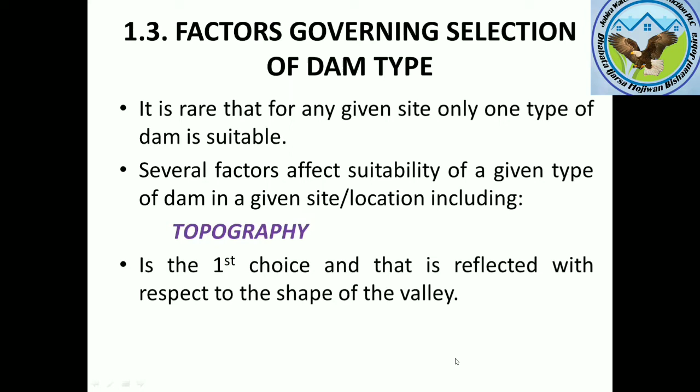Topography is the first criteria to be considered, which is reflected with respect to the shape of the valley. Topography is valley shape used.

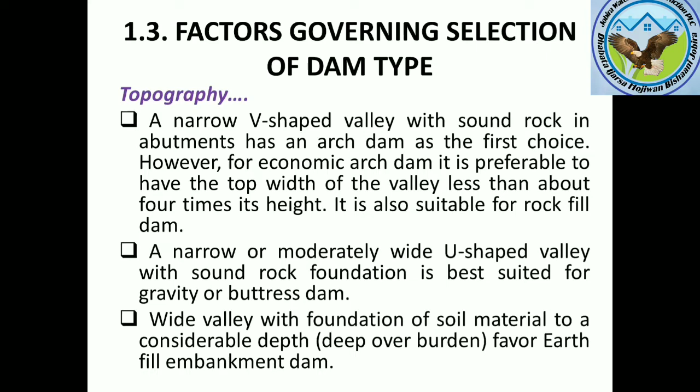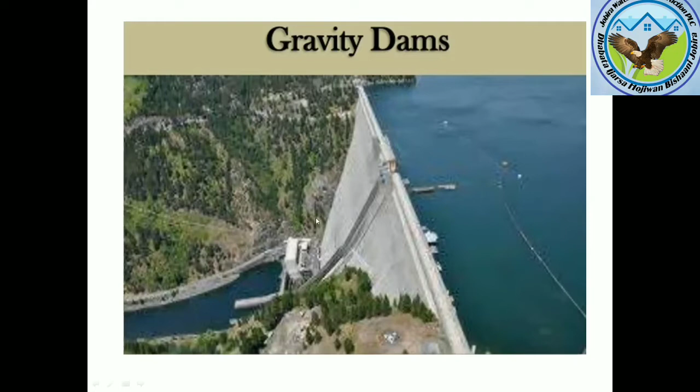See this one, it's nearly U-shaped. It seems V-shaped, but it's a U-shaped valley. In this case, this is a gravity dam, concrete gravity dam, and as you can see it has sound abutments, and this one is a gravity dam in operation. So a U-shaped valley with good foundations is suitable for a gravity dam.

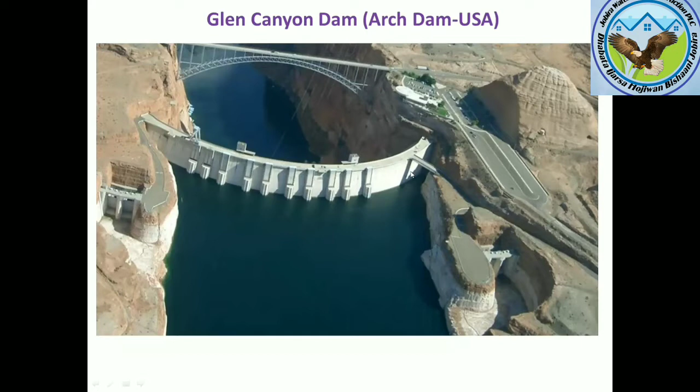In fact, there was some problem during the construction in the case of Tekeze Dam, but that was later resolved — specifically, yielding of the abutment was encountered at one occasion during the construction period.

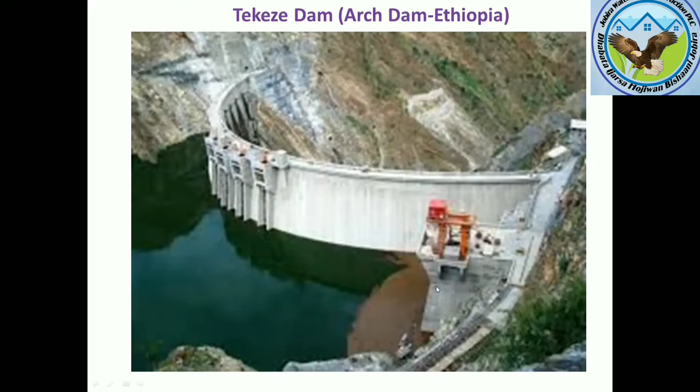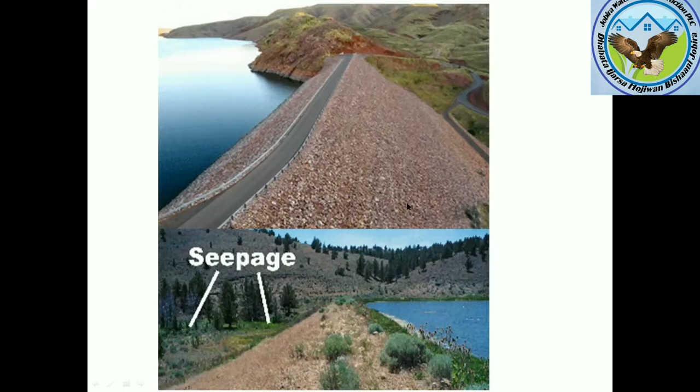And the seepage cannot go away, right? So in the case of embankment dams.

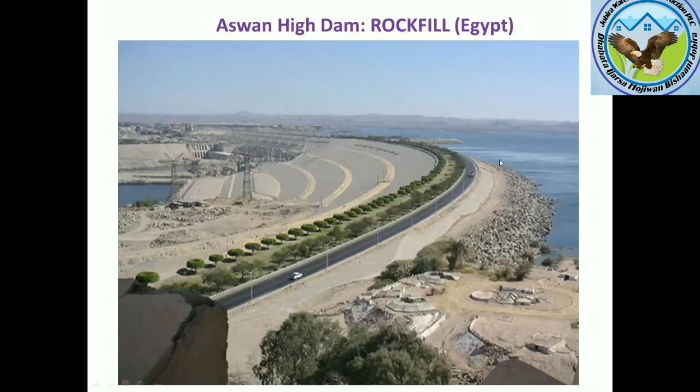And then you can see it's just very long dam crest lengths. So that's Aswan High rockfill dam in Egypt.

The other factor which affects the selection of dam type is the foundation or the geology under consideration. Foundations have to carry the weight of the dam. The dam site must be thoroughly surveyed by geologists to detect the thickness of the foundation strata, presence of faults, fissured materials, their permeability, slope, slip, etc.

So the foundation structures — something related to the foundation conditions, the geological setup — that's really important.

In nature, you can encounter quite a lot of foundations, such as solid rock foundation. If you're lucky, you can just get solid rock foundation, which has good integrity.

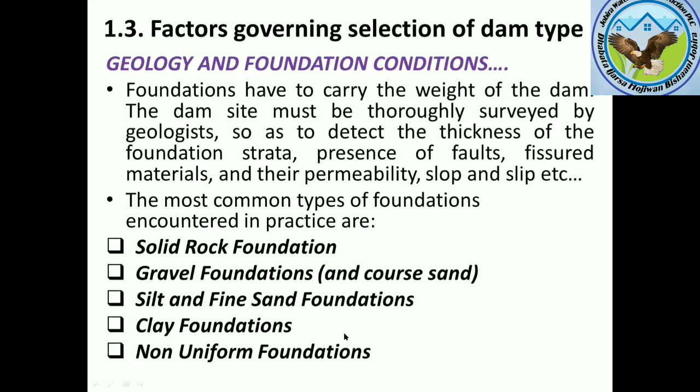Anyway, in that case, how do we go with that? Treatments of foundations are important.

We are dealing with one proposed dam quite nearby us here in Arba Minch a couple of days ago.

And then the geology and the foundation conditions were really disappointing.

The geotechnical investigation showed that at the center of the valley there was a weak foundation, but at the abutments it gave good results. But even the depth of the bedrock they could not get at the center, and they were disappointingly forced to miss the site because they could not construct any type of dam due to fear of seepage. So it's really a pressing and determining factor — the geology and foundation conditions.

If they don't give good results, if the foundation is weak, and if there is a problem with the bearing of the foundation, or if seepage is anticipated, then what's the point now? You have to just bring it down, right? So that's really the case, and that's quite important.

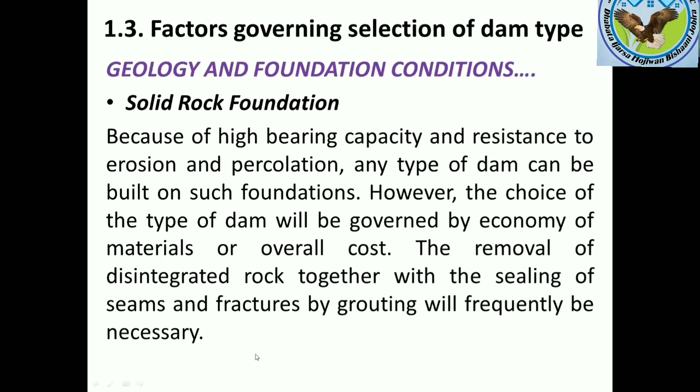Certain times you may have solid rock foundation, but that foundation may consist of weaker materials, such as weathered rock, weak zones, openings, or cracks elsewhere in the dam site or reservoir area. In that case, you may look for treatment of the foundation, such as sealing of the openings and fractures by means such as grouting, which fills up the voids or cracks very well, and then you may use that site for construction of a given type of dam. Anyway, solid rock foundations are very good.

We can also have gravel foundations and coarse sand. If well compacted, such foundations are suitable for earth fill, rock fill, and low concrete gravity dams - dams having heights less than 15 meters. As these foundations are frequently subject to water percolation, foundation seepage is a tempting problem in the case of gravel foundations. Special precautions must be taken to provide effective water cutoff or seals.

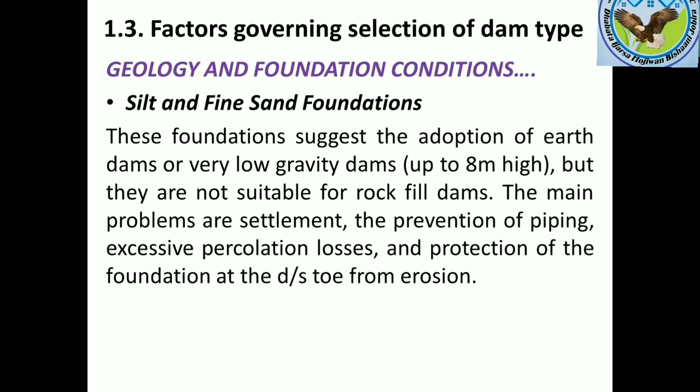excessive percolation loss, and protection of the foundation at the downstream toe from erosion, in the case of silt and fine sand foundations. Clay foundations can be used to support earth fill dams after special treatment - these foundations require special treatment after consolidation of the foundation. The behavior of clays is that they hold water for a long period of time.

If clay holds water for a long period of time in the foundation, the uplift pressure on the dam bottom will be very high. So that should be avoided, and to avoid it, the clay should be consolidated - meaning the water from the clay foundation should be removed. Of course, there are methods to consolidate clay.

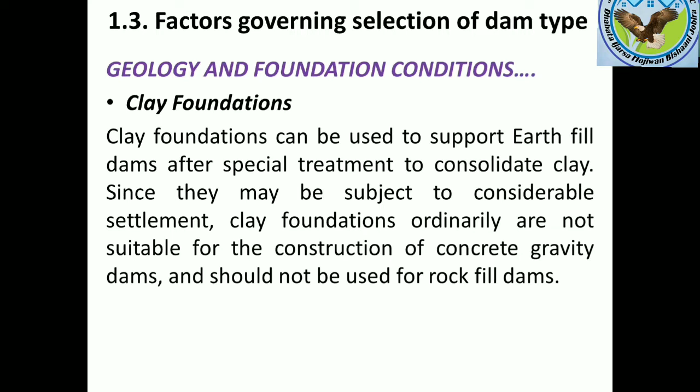That brings the issue of settlement quite high in the case of clays. So clay foundations should be treated very well by consolidation mechanisms and other treatment methods. Clay foundations ordinarily are not suitable for construction of concrete gravity dams because of the excessive settlement that's expected. Rock-fill dams also are not employed on clay foundations because of the settlement problem.

Finally, you have non-uniform foundations, which is the physical and practical case in the field - you have quite a lot of different materials in the foundation. That's non-uniform: somewhere gravel, somewhere clay, and you may have a non-uniform foundation of rock. Soft material may have to be used if the dam is to be built. Such unsatisfactory conditions have to be dealt with by special designs or appropriate foundation treatment.

So you may not just treat one place, but you may treat different places, either in the foundation of the dam or in the reservoir area.

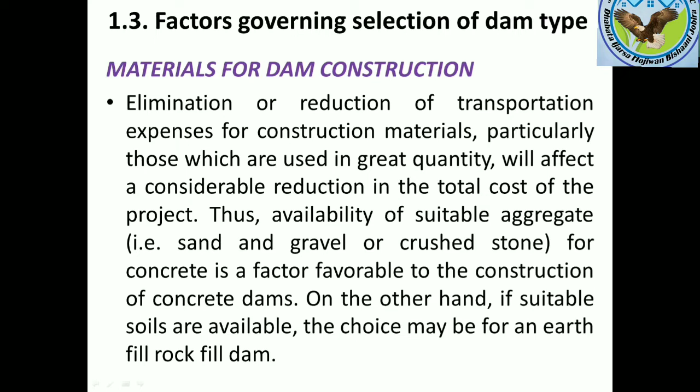The other factor is spillway size and location. This relates to how we classify dams based on the hydraulics of the dam.

That's overflow section and non-overflow section - we divide the dam into two, overflow type of dam and non-overflow type of dam. Among these, overflow type of dam is directly the spillway, right?

And this spillway in storage dams specifically is meant for allowing flood water to flow over it.

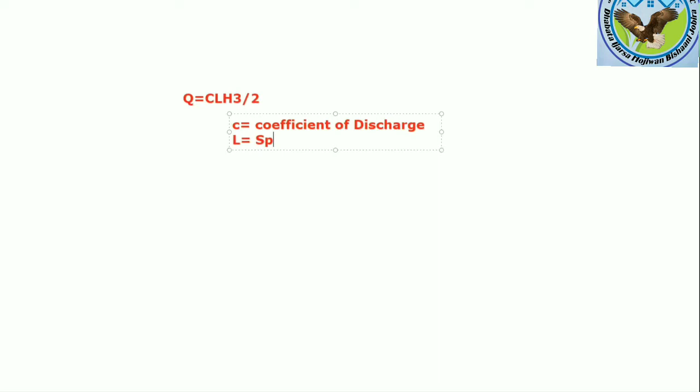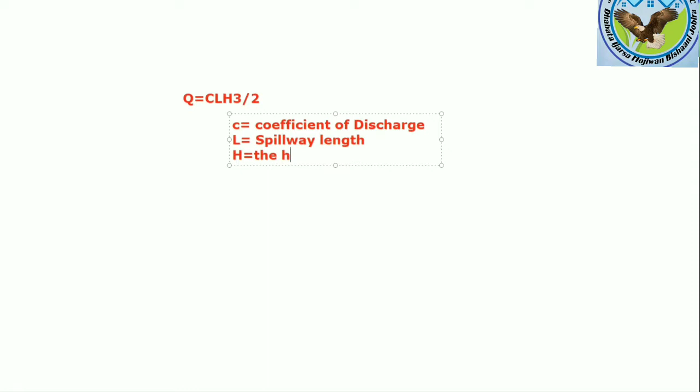You have L equals spillway length, right? And then H, the height over the crest, the height of water - the head, that's more technical term according to hydraulics, the head over the crest.

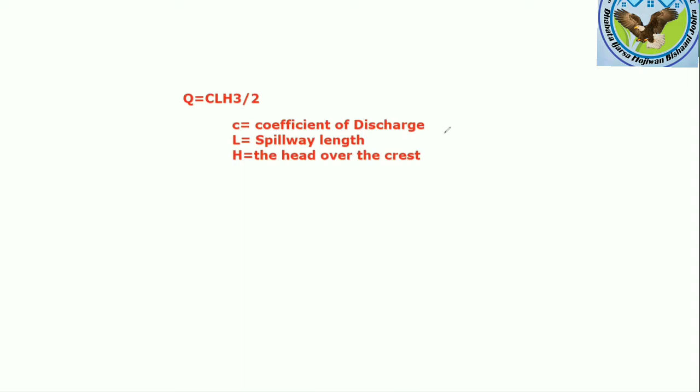So now, for example, if you take one valley - let's say this is the valley - and we are just intending to construct a dam here.

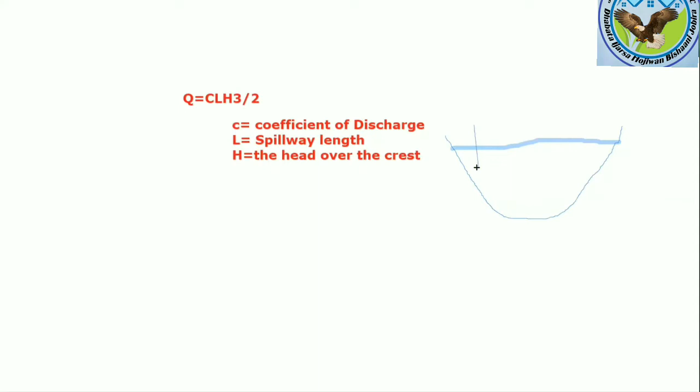spillway መሃል ላይ ቢሆንና right, so let me just use that one with this one. It's not showing.

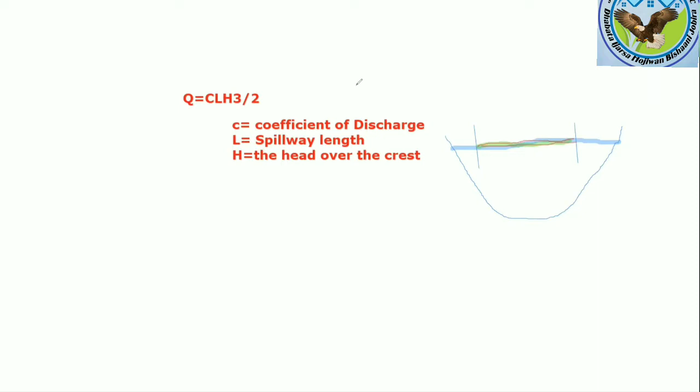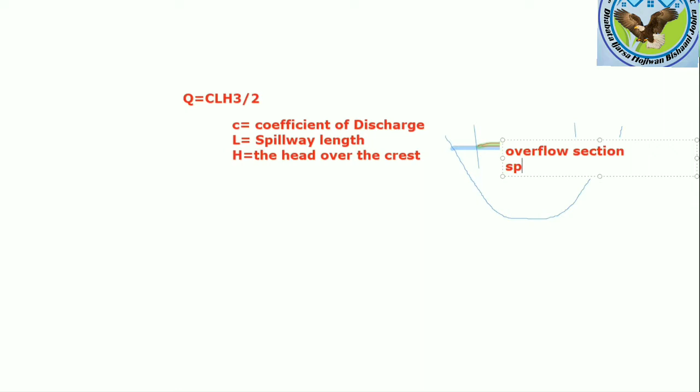ይሄ spillway ነው እንበል፣ ይሄ portion ነው ማለት ነው፣ right so this is overflow section ወይም spillway ብንል እቺ ከዳር የቀረችው ናን ኦቨርፍሎ ዳም ናት። ዳም ሲሰየም በናን ኦቨርፍሎ ዳም፣ ለምሳሌ ኤርዘን ማቴሪያል ከሆነ ኤርዝ ፊል ብለን እንጠራዋለን ማለት ነው፣ ናን ኦቨርፍሎ section right

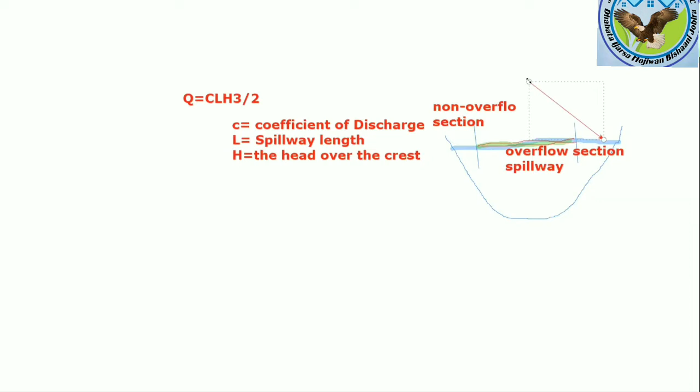meaning እቺኛ section እና ይሄኛው overflow section ማለት፣ in real design and real construction overflow section በተወሰነ ከዋናው ዳም ዝቅ ማለት አለበት።

now the point is, this one you can imagine that almost all the section of the dam is just overflow section or spillway። ስለዚህ ይሄን ዳም እዚህ ጋር ሌላ ማቴሪያል አምጥተን ኮንስትራክት ከምናደርግ፣ በኮንክሪት ወይም ሲሚላር ማቴሪያል as overflow section ጋር ካለው አንድ አይነት ማቴሪያል አምጥተን ማሙላቱ ይሻላል ስለዚህ ዲተርሚን ያደርጋል ማለት ነው፣ spillway ሳይዙ ዲተርሚን ያደርጋል ማለት ነው።

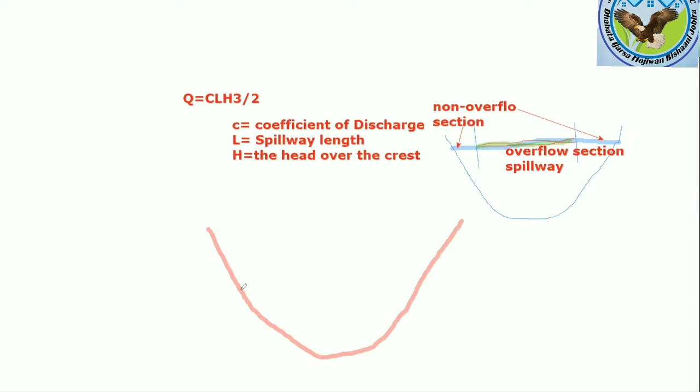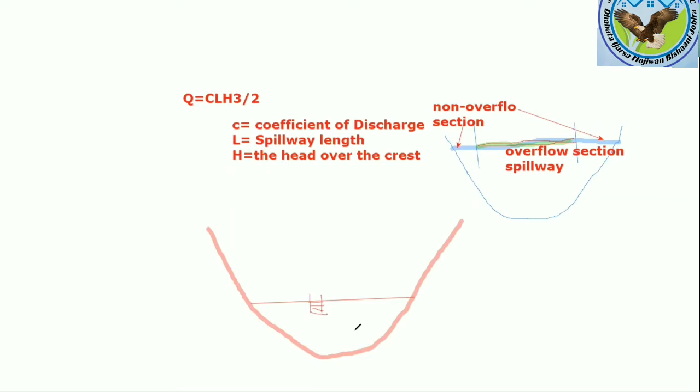but if we have very small section, on the other hand you may imagine that your dam is say it's like this one, and then say dam የምናደርገው ምናልባት እዚህ ጋር ቢሆን፣ ምናልባት spillway እቺ ብትሆንስ? spillway እቺ area ብቻ ብትሆን፣ you see it's just quite large portion non-overflow section ነው ማለት።

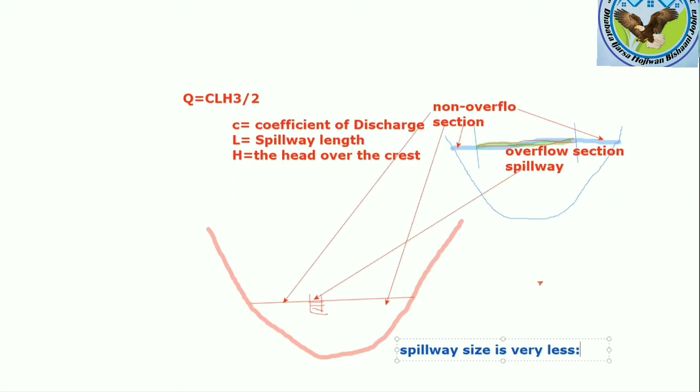so in that case the size of the spillway is quite small, non-overflow section ስለዚህ in this case the spillway is very less, size is very less። so in this case the dam type may not be governed by the spillway size

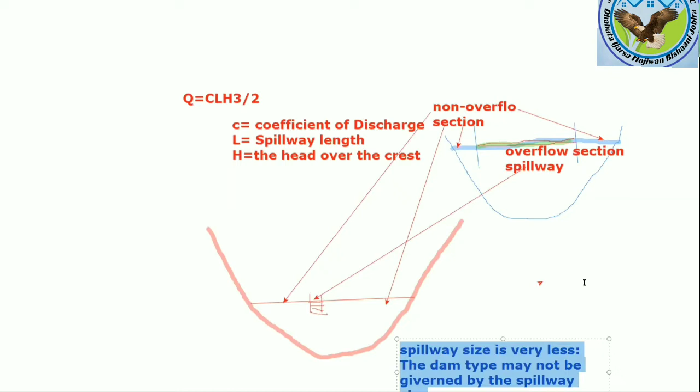ነገር ግን በዚህኛው on this case the spillway size determines the dam type ምክንያቱም ከራሱ ጋር አንድ እንዲመሳሰል ነው የሚያደርገው ማለት

so that's actually the spillway size ብለን how the spillway just affects the type of material, I mean the type of dam in a given site የምንለው ከዚህ ጋር ከዚህ ኮንሴፕት ጋር ይያዛል ማለት ነው። hope you are clear with this one። spillway ማቴሪያሉ ሁሉ ጊዜ ኮንክሪት

ግራቪቲ ለምሳሌ ኮንክሪት ነው በአብዛኛው ጊዜ። ስለዚህ ሳይዙ በጣም ላርጅ ከሆነ that means the length, right? actually length የምንለው ይሄ ነው፣ here is the length ከዚህ እስከዚህ

ይሄ ማለት if the length is very large, ሳይዙ large ነው ማለት, then in that case it obliges us to construct the same material as that of the spillway. Concrete gravity dam እንዲሆን dictate ያደርጋል ማለት ነው።

On the other case, if it is quite less, then in that case it just gives us that the spillway size has no determining capacity for it to be like that one, so actually the length here is very small። So in this case, የግድ spillway material አይነት type of material መጠቀም አንገደድም, ምክንያቱም quite large portion of the dam is the other type of material መሆን ይችላል ማለት ነው።

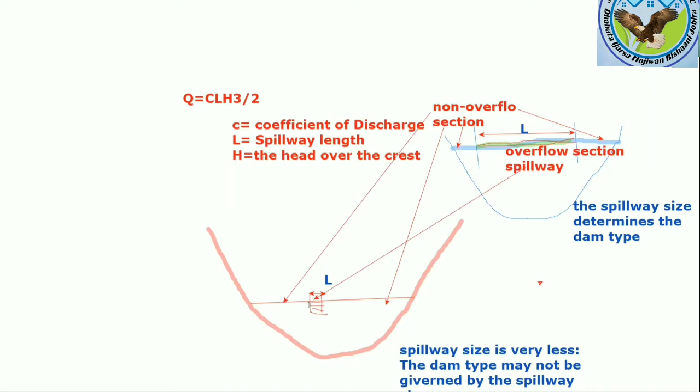So how this one? spillway size እና location የምንለው ለዛ ነው ማለት ነው። location ደግሞ spillwayን center ላይ እናደርገው or towards the abutments እናደርገው, or we have to provide it quite separate from the dam የሚለው under question ሊመጣ ይችላል ማለት ነው። አብዛኛውን ጊዜ if concrete dam በሚሆንበት ጊዜ spillway can be anywhere ሊሆን ይችላል, ምንም ችግር የለውም።

ነገር ግን earth fill እና rock fill በሚሆንበት ጊዜ spillway location just ከግምት ውስጥ በጣም ይገባል, ወይም it's just critical to consider። ምክንያቱም earth fill ሌላ ማቴሪያል ነው, እንደገና ደግሞ ኮንክሪት ሌላ ማቴሪያል ነው። ሁለቱ በአንድ ላይ ስለሚመጡ ዊክ ዞን ይኖራል ማለት ነው። ስለዚህ ሴፓሬት ፖርሽን ቢኖርን በጣም ቆንጆ ነው, that means spillway ለብቻው ሌላ ቦታ as a saddle dam case አይነት

ቢኖር that's preferable። ነገር ግን if it is not possible to get such a saddle portion for constructing a spillway for earth fill embankment or rock fill embankments, then the spillway should be placed near to the abutment። በተቻለ መጠን ወደ abutments ተደርጎ construct ቢደረግ ይመከራል ማለት ነው።

So location of the spillway as well as the size of the spillway determines the type of dam የምንለው ከዚህ ተነስተን ነው ማለት ነው። okay, the spillway is a vital appurtenant structure of a dam. Frequently its size, type, and the natural restrictions in its location will be the controlling factors in the choice of the type of dam. Spillway requirements are dictated primarily by the runoff. Now, spillway capacity determined የምናደርገው በrunoff ወይም በhydrological analysis ነው ማለት ነው።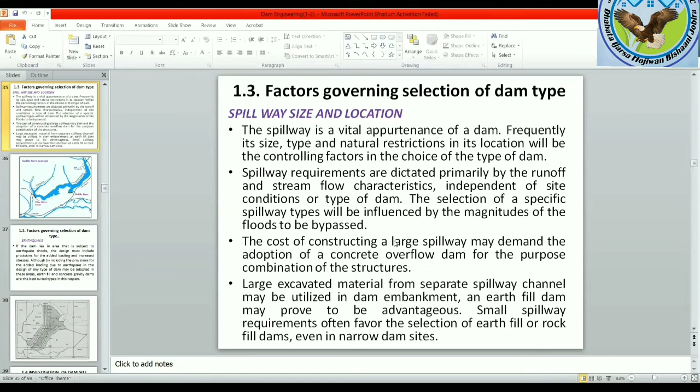This is just a saddle dam example. This is the main river. Here we might provide a dam, and the river is just coming like that. When you are constructing the main dam here, you may have a saddle portion - a lower area or lower topography in the valley may exist. So there we might provide a saddle dam.

That can serve as a spillway. If we do earth fill here, we can construct the saddle dam here. In fact it's preferably so, not that whenever there's a saddle dam, earth fill and spillway always come together. Preferably, if possible, the foundation conditions, the topography, and other conditions dictate how we do it. Saddle dam is provided - sometimes the saddle dam itself may be a non-overflow dam, because we don't want

to lose the water. Because if we do not dam it here, this reservoir would not happen - it could leak through here, so we need to plug it. We need to provide a barrier here, that's the saddle dam. And this one is the main dam.

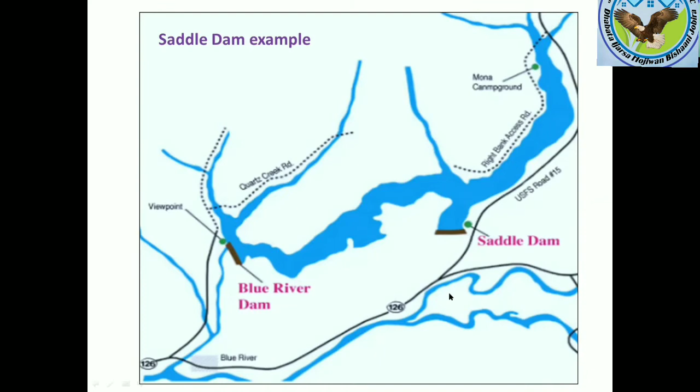But sometimes we can use this one as a spillway. If this one is an earth fill dam or rock fill embankment, one type of material - rock fill or earth fill - we use here, and a gravity section or overflow section we can use here. Since they are different materials, we can use them separately, right? That's just an example. The other factor which governs selection of a given type of dam is earthquake, seismicity.

Sometimes there are things that come from earthquake prone areas. What earthquake brings is added load during its occurrence. So that should be considered, because it's just a very huge amount of inertial load getting created within a very short period of time, which can destabilize the dam and damage it, or destruction may happen to the dam

due to earthquake. So that must be taken into account. But it does not mean that earthquake is everywhere, no. But there are areas which are known from historical experiences and historical information - there are earthquake prone areas out there. If the dam lies in an area subject to earthquake shocks, the design must include provisions for added loading due to inertia and the stresses coming thereof. Also, by including the provisions for added loading due to the earthquake in the design, any type of dam

may be adopted in these areas. Earth fill and concrete gravity dams are the best suited types in this respect. Most of the time, the dam types that can withstand earthquakes are earth fill and concrete gravity dam, because of their inherent stability nature. The others, for example arch dam, if we take it, it's just complicated because

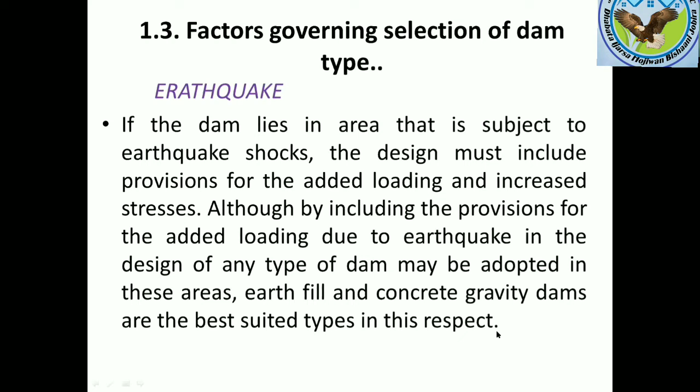So the earth fill and concrete gravity dams are the best suited types in this respect, right? Because if you take the arch dams, you know, the profiles of these types of dams are quite sensitive for any kind of destabilizing load. So in that case, they may be prone to failure in the case of earthquake. So comparatively, the gravity dams and earth fill dams are quite suitable for earthquake-prone environments.

You can see this earthquake seismicity region in Ethiopia. There are different regions - Region 1, 2, up to 4 are there. Region 4 is quite serious, in which case you need to take care about that one, right? That's mainly the Rift Valley region, the central region of the Rift Valley. Then it actually reduces towards the north and the southern regions, as you can see, when you are going far away from the center of the valley. So dams which are to be constructed in the case of Rift Valley should be considered for earthquake loading, right? Earthquake tremor may be there, and designs should consider that, right?

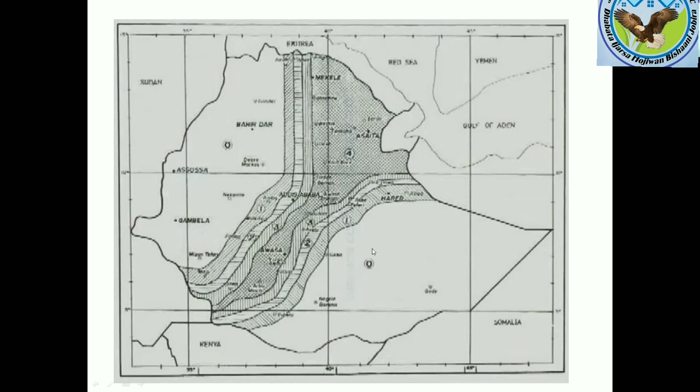Yeah, this is in a nutshell the different factors which are affecting the dam type selection for a given type of dam. In fact, you cannot just take one type of factor or one factor to decide a given type of dam in a given site. You have to have different considerations and factors come together and then decide the best alternative.

You may have two, three, four alternative sites. In one, earth fill embankment may be best, and elsewhere gravity dam may come. Elsewhere, you may have buttress dam as an alternative, and then you work out all the factors which can come together, and that provides you the best alternative, and then select the type of dam for a given site, right?

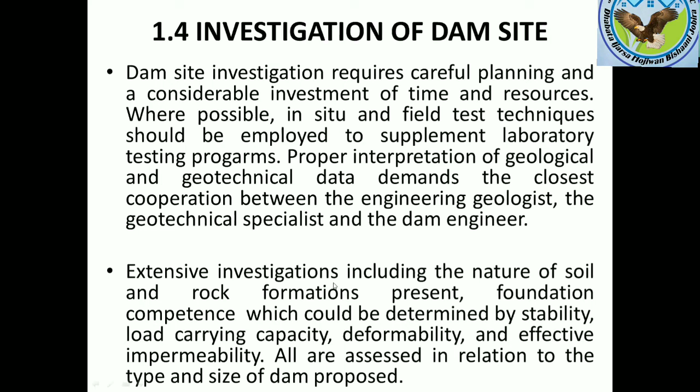Extensive investigations include the nature of the soil, foundation material, rock formations in the foundation, the foundation competence including bearing capacity, properties of the foundation material such as hydraulic conductivity which relates to seepage analysis, the deformability of the foundation, effective impermeability, and so on. All these should be assessed in relation to the type and size of the dam proposed.

What has been said so far is that investigations in dam projects can consume up to 1% or even 3% of the project cost. That's actually important because before bringing such a game-changing structure into an environment, you need to investigate that very carefully.

There are several issues that need to be investigated before, such as the settlement issue, in which you are going to remove settlers from the reservoir area or even from the dam site if they are there, which is important. That's the social issue.

You have the hydrological issue. You need to determine the peak flood that's expected to occur at the site, which may damage the structure if not well investigated during the study time.

The foundation issue, the structural analysis, the hydraulic aspect of the dam, all should be investigated very well at the design stage. Otherwise, the dam project is quite critical and questionable.

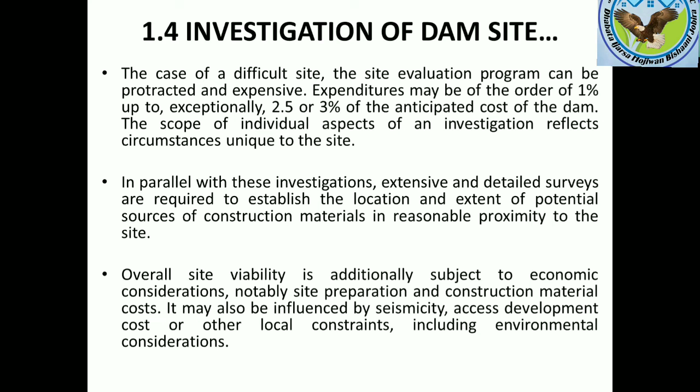Including environmental considerations. When we investigate the dam site, we pass through 3 major steps. The reconnaissance is just a kind of walkthrough survey. You don't do much investigation, analysis, or data collection, but it's kind of a walkthrough survey, just watching what's there at the site.

That's reconnaissance. Then after reconnaissance, you may have 1, 2, or 3, or even more anticipated sites. For these, you need to carry out preliminary investigation. Then from these preliminary investigations, you need to choose the best alternative, which is feasible from different aspects. Finally, you come to the final investigation, where you need only one site, not 2 or 3 or many sites.

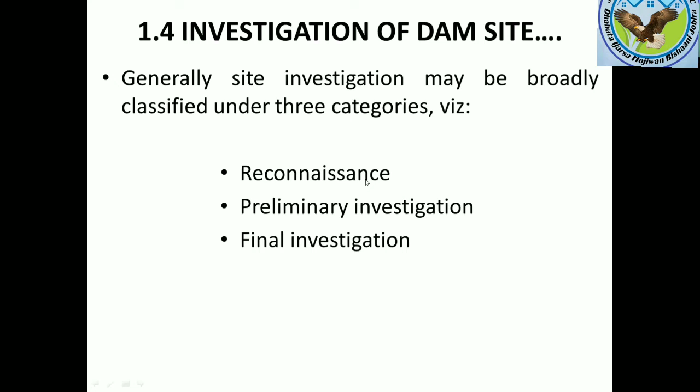The preliminary investigation aids you to come to the final site, where you have to construct and design your dam. There, quite detailed studies, detailed investigations, even topographic surveys are done along with detailed data collection. The geological aspect, the geotechnical aspect, and the structural aspect of the dam are refined here in the final stage. Then after that, you go for construction, which is the other aspect of dam construction.

Reconnaissance involves visiting all available sites which have the possibility of being utilized and gathering information which will be useful for planning the detailed surveys and investigations. The information to be collected may include geological data without any kind of subsurface exploration.

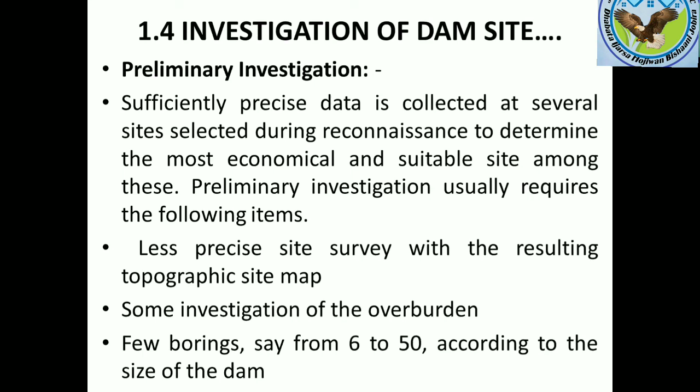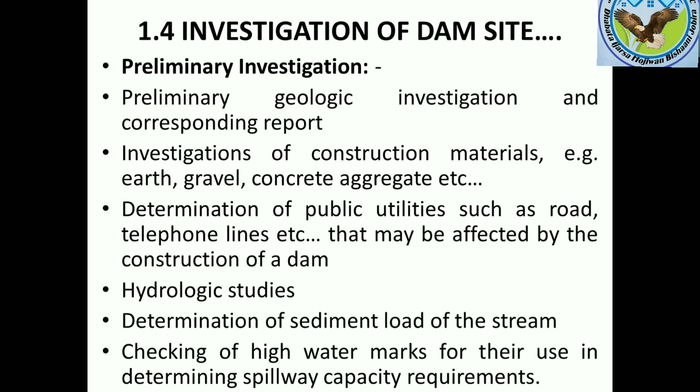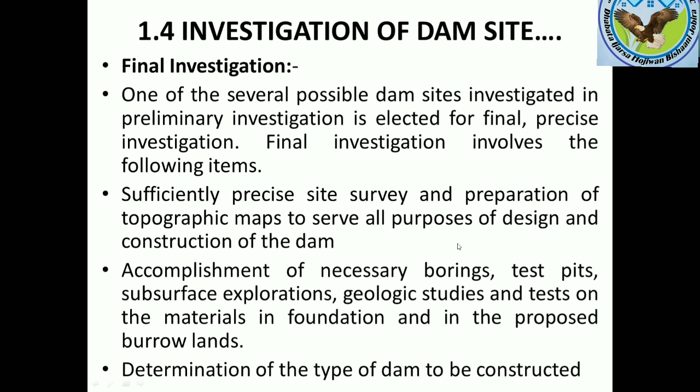Determination of the type of dam to be constructed - this is known here. Planning of the foundation treatment - what kind of treatment is needed? In each of the subsequent chapters, we will see the foundation treatment approach that is going to be employed. To decide these, we carry out study here at the final investigation.